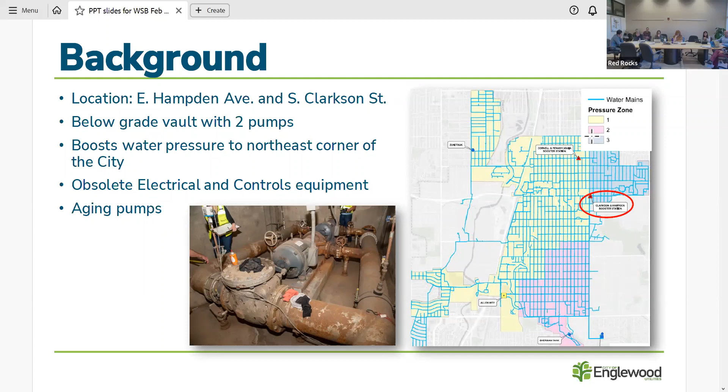So the scope of work for this project is to demolish and replace all pumps and piping. It will be an in-kind replacement of the pumps and piping. We will add new flow and pressure meters, move our electrical and controls above grade to meet modern electrical safety standards, and provide new HVAC and plumbing in the vault.

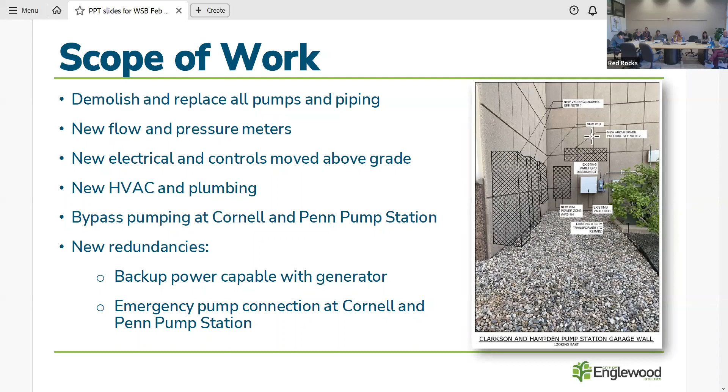While the booster pump station is being constructed, we will do bypass pumping at our Cornell and Penn pump station, which is another pump station in our system that is not operational but served the same purpose of boosting pressure from zone 1 to zone 3. In addition, we'll have new redundancies to provide backup power to the C&H pump station with a generator, and we will have emergency pump connection capabilities at the Cornell and Penn pump station location. So when they hook up temporary bypass pumping at Cornell and Penn, they'll leave the infrastructure in place for a future potential emergency backup scenario where we may need to provide a temporary pump at that location.

So we're doing a contract for construction. After intent to award, we discovered that we needed a new variable frequency drive, which controls the speed of the pumps. So our base bid was adjusted from 1.526 to 1.583 to accommodate that additional piece of equipment.

There are some long lead items, so if we give notice to proceed this month, they'll begin procurement, and then we'd look to actually do construction in the third quarter of this year.

So our total contract amount is 1.583, and we're requesting a staff-managed contingency of 10%, so our total project authorization would be 1.74. And then in addition to that...

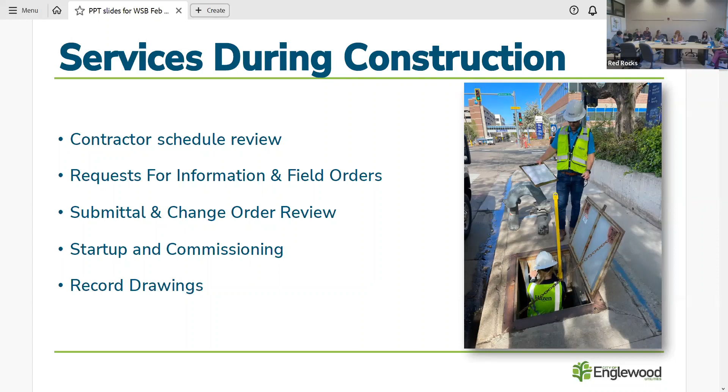We are bringing a contract for services during construction. This would be with Hazen and Sawyer. They would provide schedule review, review the technical submittals for electrical and mechanical equipment, and review requests for information from the contractor. They'd support startup and commissioning, and then make sure we have accurate record drawings at the end of the project.

They were selected because they did the design. This design was part of the old Hampden utility improvements design package. We've broken out the pump station because it will be fully WIFIA funded, versus the old Hampden project, which will not. So we wanted to break this one out for construction to make the financial tracking simpler. The contract with Hazen and Sawyer would be $133,000, requesting a 10% contingency for a total authorization of $146,000. Any questions?

I guess I've got a quick question. Since the backup is on Cornell and Penn, I know Xcel was doing a lot of work there as well - is there any concern about them touching what they shouldn't have touched? Yeah, that's a great question. We have seen that work, and we expect it to be complete by the time we're out there and needing to use it. But that's something we'll work with the contractor to make sure is coordinated.

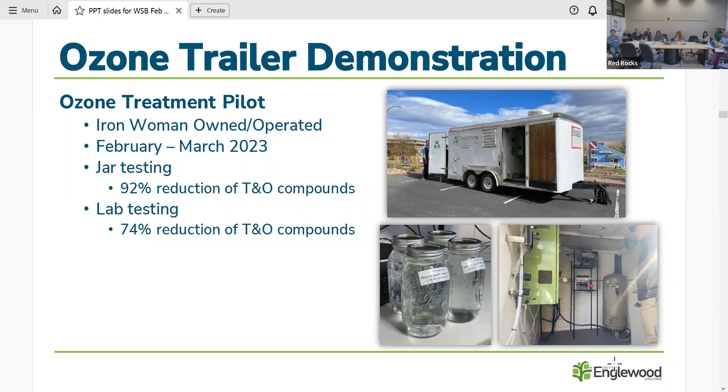That's why we're pursuing ozone as a permanent installation by acquiring a trailer with an ozone setup to feed it continuously into that decant stream, hopefully minimizing if not eliminating the taste and odor issue we experience from that decant stream.

So the proposed work basically is we talk to the contractor. This is not a typical installation. Most ozone installations come on a full scale that require an ozone contactor, ozone generator, and significant improvement to the power grid because they consume so much power. However, in our case, we are not going to treat the entire volume. We're just going to attack the problem where it exists in that decant, which is a much smaller stream, and keep the need for ozone to a minimum, the installation to a smaller scale, and a much more manageable cost.

So the idea is to work with a vendor that specializes in building those trailers, the same vendor who provided us with the demonstration unit. They're going to fabricate it and deliver it to us. Before that, we're going to go through the approval process with the state and get it permitted, install it, do staff training, and work with them on warranty services, which includes one year of maintenance services as well.

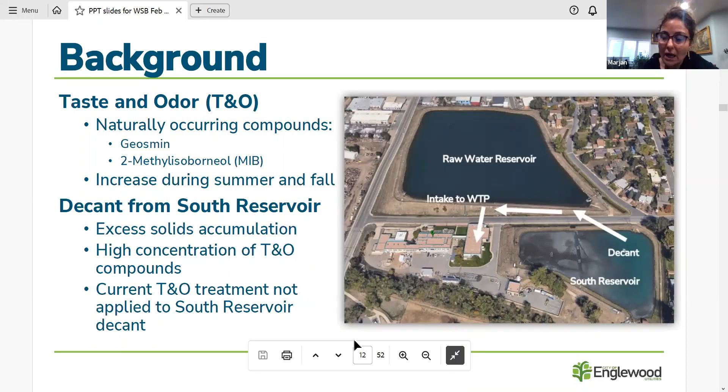I understand the intent is not that. I'm saying, have you seen the actual data that shows the outcome of that? I can see the value as the water gets ozonated and then it just gets used, that helps. But if there's a time lapse, does that ozonated water actually promote the growth of fungi? It helps with the good bacteria, but I want to see what kind of data this company showed you on that process.

There's a lot of research on ozone. The half-life of ozone is incredibly short. Yes, I'm familiar with it, I actually have an ozonated machine myself. I'm very familiar. So ozone is not going to stay in the water for very long.

That was one of the motives that we chose that side stream in particular, because it's going to end up in the North Reservoir and it's going to gas off after it does its oxidation, off to the atmosphere. So very, very little of it is going to stay in the water and come into the facility itself.

So I understand in that reservoir, there is a mechanism that circulates the water, am I correct? One of the times I came in you guys explained that to me, which was extremely helpful. So what I fail to recognize is, okay, you get this percentage of the water ozonated, now it's going to enter the reservoir, and now you've got the time factor plus the volume factor involved in that process.

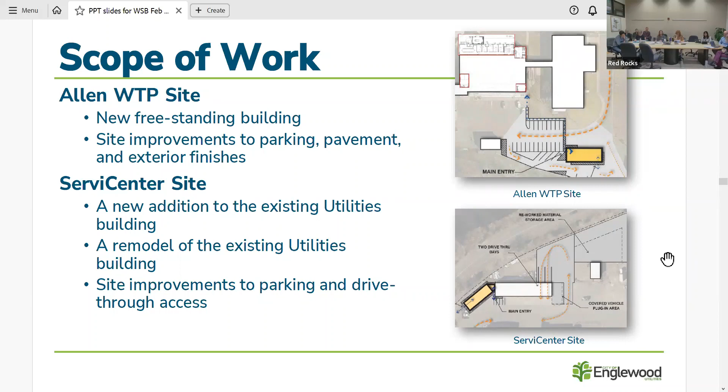Our contract summary: Eidos was competitively selected in 2021 to do the facilities master plan. That evolved, as Peter's explained in past meetings, into these phased office projects. Eidos designed phase 1 and they've completed the phase 2 concept study, and we're just going to build upon those concepts and take this to final design.

The cost for design, as you can see below, is Eidos's total contract amount of $323,000. We're requesting a staff managed contingency for a total project authorization of $355,000. Any questions?

Adam, I had a question. I was glad to hear a little bit about site security, so access control, security of the building, all that's going to be added to the design. What about sustainability, energy efficiency? Is that all part of the city's building code, or? We still have to meet to make some of those decisions around our energy efficiency, but yes, we want to align. It'll be part of this design, this final phase though?

Yes. We have talked about having parking spots for electric vehicles, but also looking at what type of heating source do we want—maybe solar, perhaps. We really haven't had those discussions yet, to my knowledge. Okay, great, thank you.

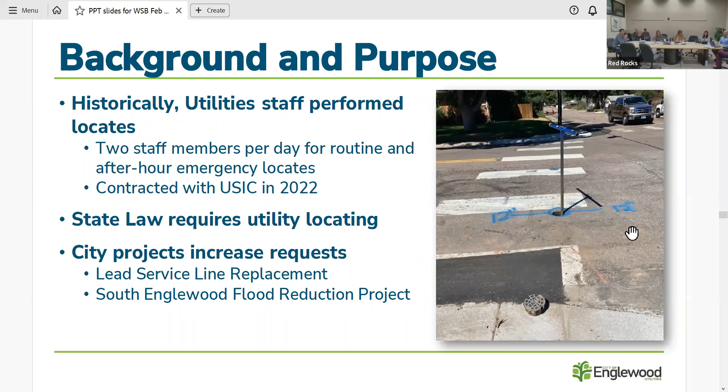So again, the scope of the work here is when there's a call, we go out and we have to mark the water, the sewers, the ditch, stormwater lines, as is required by state statute. This is required of us all the time, 24 hours a day. It doesn't matter what day it is, we have to respond to these calls. As you can imagine, that takes a lot of time and resources and staffing.

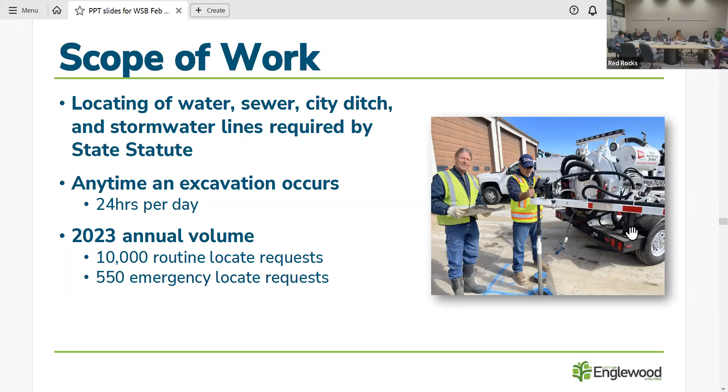2023 annual volume: 10,000 routine locate requests. I was actually under in my assessment of what I thought it was. Of those, 550 were emergency locates. That means everybody stop what you're doing, no matter what time of day, what weekend, what holiday it is, and have staff respond to that, which gets pretty expensive as well.

So up for renewal is this contract with USIC, the same contract we've had the past 2 years. They've been great, it's worked well for us. Essentially, we don't participate in this process at all anymore - there's a call comes in, they go out and do this work for us, and it goes well. Since USIC has been doing this work, we've had 8, 9, 10,000 calls a year, and I think we've had 2 or 3 things hit, which is a remarkable number if you think about all those calls.

Bringing forward to you the opportunity for this contract to be renewed. The total contract amount is $200,000, with a 15% staff managed contingency for a total project authorization of $230,000, which if you do the math on that, turns out to be about $20 a locate. So it sounds expensive until you realize the amount of requests that we get, and you realize it's not terribly expensive for us to do this. With that, I'll take any questions.

Doesn't sound like we have any. All right, no questions.

I'll get a motion to recommend the city council approve by motion item 6D as written. So moved. Second. Any further discussion? All right, all in favor, please say aye. Aye. Opposed? All right, motion carries.

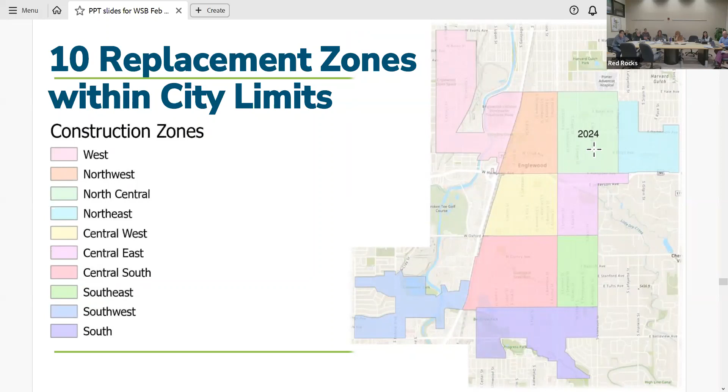Hazen has worked to break up the city into different construction zones. There'll be 10 construction zones that we work through in the coming years to replace lead service lines. You can see that 2024 is in the north central zone, shown in green. That's the zone we will target for this year, bordered on the north by Yale, on the south by Hampden, and Broadway and Downing on the east-west borders. There's about 650 either lead, assumed lead, or unknown lines in this area, and we think we can address each of those lines this year.

What we will also be doing is potholing or field verification for the 705 assumed non-lead lines that were built before 1960. The state has provided guidance that they'd like to understand, pre-1960, what those service line materials are. Through our potholing and machine learning we got to a certain number, but we will go through and verify that all of these are copper and not lead.

So the objectives through our lead line replacement is to complete construction and remove all lead service lines or galvanized service lines by 2027. We will have an extensive customer outreach program. Our plan is to bring that to this board and city council in April, just to let you know what our outreach plan is through the rest of the year.

And then we will also be continuing to collect field data that will continue to inform our inventory moving forward. Our plan is to ramp up replacements over the next several years, starting with 650 this year, 1,000 in 2025, and then the remainder in 2026.

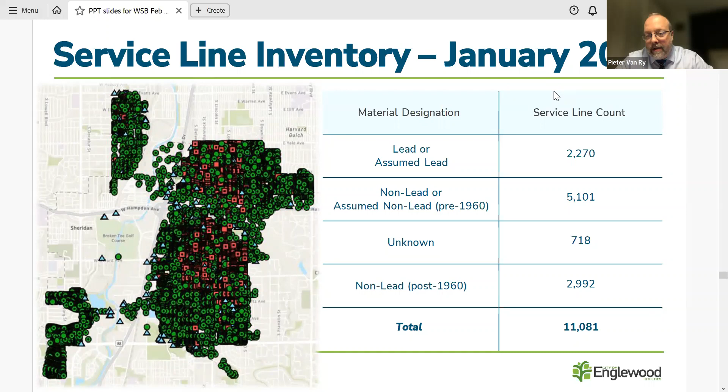When I saw these numbers come in and they were at 2,300, I was still a little bit surprised that they're that low. Pleasantly surprised, but until we actually get the true verification home by home, service line by service line, we won't exactly know what the number is. Now, if it's post 1960, we are going to assume that those are all non-lead because that's what the data shows. However, we will offer to anybody in the service area who has, say, a 1963 home and wants us to verify whether it's lead or not, we'll go out and do those on request.

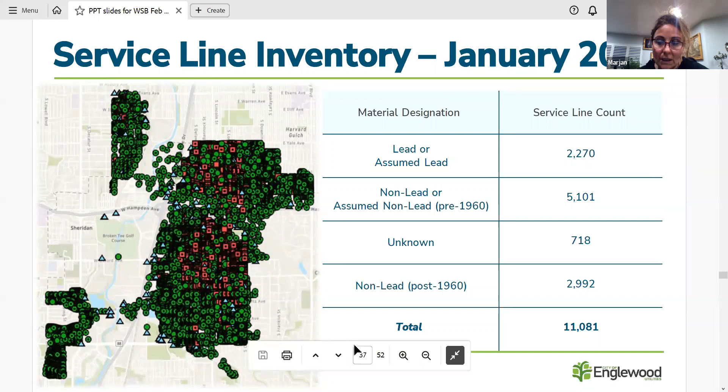I honestly have a really major problem with this presentation because we do have 2 city council members in here with part of the water board member. And I remember clearly that it was voted against the consumers' right. So then they were able to pass to go through people's homes without their consent because of the presentation of those numbers, how much urgency it had, that we had to overcome people's right to make a decision on that and hear the true number. I really, really have a problem with that, Peter. I don't think it is right to present data differently to different city council members.

So, Marjan, we didn't have this data when we made that presentation last fall when we were doing that first round of code changes. But I remember that part of the city council meeting, it was presented how much it was important because so many people have the lead lines, and the right was taken away from them to consent to this or not. So now we have a more accurate number.

And so my question is, why wasn't this data brought up initially, so the city council could make a better choice for the residents of Englewood? Because when we were bringing those code changes, it was to do the assessment. So we didn't know until we actually did the potholing project.

So we potholed 370 homes, which then informed the data set that we came up with. There was no way to know that. We couldn't have provided that information because we didn't have it at that time. Thank you for explaining, but what I'm asking is how then could that decision have been delayed in the city council until you had a more proper and more accurate number.